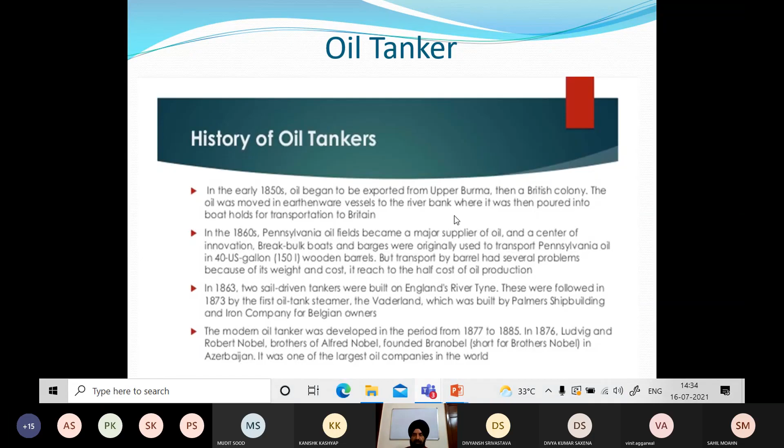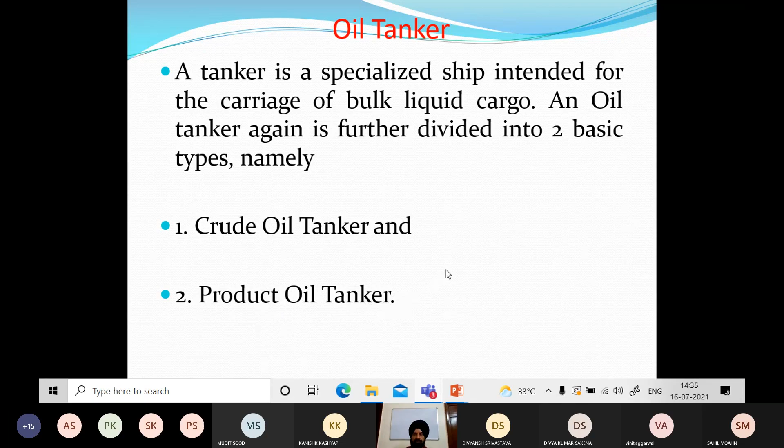So a tanker is a specialized ship intended for the carriage of bulk liquid cargo, and oil tankers are further divided into two types: crude oil tanker and product oil tanker. Crude oil, all of you know what it is - it's just raw oil, mineral oil, which is found in the earth. It is extracted and then a little bit stabilized and then transported from one place to another. Of course all the countries, everybody needs oil. Finally it is refined and then various products are made and they are also again transported. That's also what we call a product carrier.

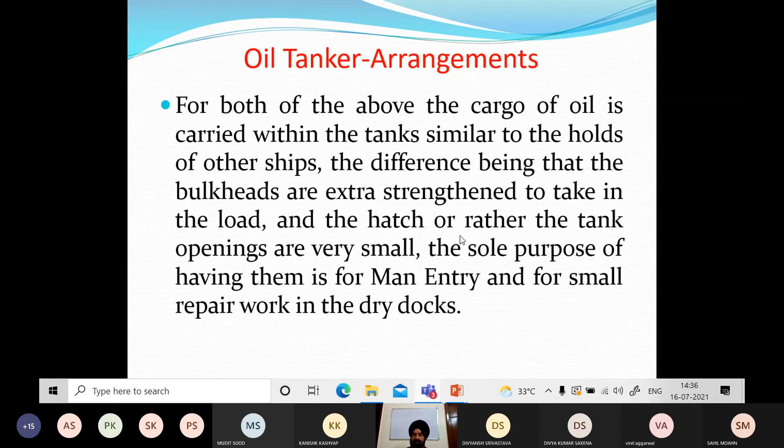Now for both of the above, the cargo of oil is carried within the tanks. Like on other ships you have cargo holds, here we have tanks similar to the holds of other ships. The difference being that the bulkheads are extra strengthened to take in the load, and the tank openings are very small. Now you've seen on other ships, bulk carriers, container ships, the hatch opening is too large for loading the cargo. So here you have nothing, very small tank dome, only in case you have to go for inspection or repairs. The sole purpose of having them is for man entry for small repair work in dry docks. Otherwise it's totally an enclosed tank.

Now the cargo of oil is loaded onto the ship's tanks by pipelines which are fixed. These are not portable, everything is fixed on the ship, permanent structure. The shore pipelines are connected to the ship's pipelines at the manifold on either side of the ship. So when the tanker comes to the terminal for loading or discharging, in the midship area there is basically what we call the manifold, and the shore pipelines are connected there. Previously it used to be flexible rubber pipes, and now, a long time back, we started connecting steel arms, what we call the chiksons.

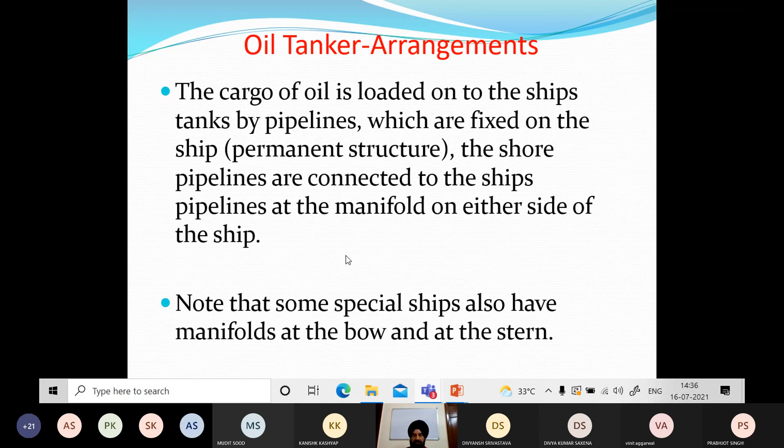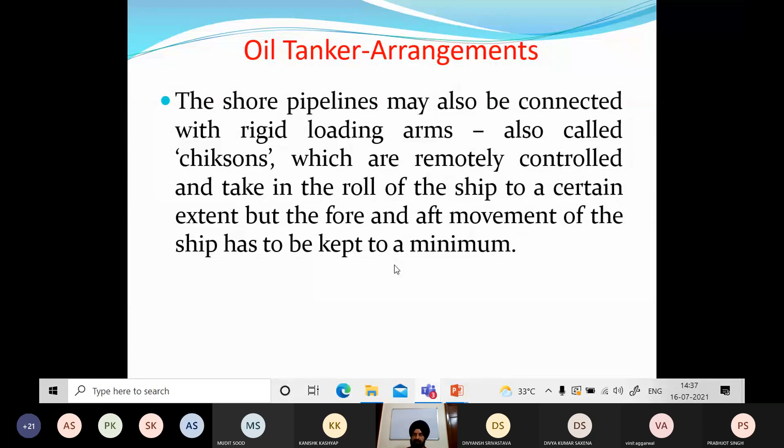The shore pipelines may be connected using flexible steel-rimmed rubber hoses, for small ports or ship-to-ship transfers. These flexible hoses come in small lengths and are connected to each other by nuts and bolts, making them into long pieces. But otherwise, nowadays most ports are also connected with the rigid loading arms, what we call the chiksons, which are remotely controlled and take in the roll of the ship to a certain extent, but fore and aft movement of the ship has to be kept to a minimum.

Now this is how basically - this is your terminal, the ship comes, and this is the chikson, the loading arm, very easy to connect. The only problem here is, yes, they can take this movement, but the movement of the ship in fore and aft - so as a duty officer you've got to be careful, you've got to have your team in control so that the ship's mooring lines, especially the springs, are always kept tight, so that there is no movement in the fore and aft direction. Otherwise these arms are very expensive, they can get damaged, and there can be pollution.

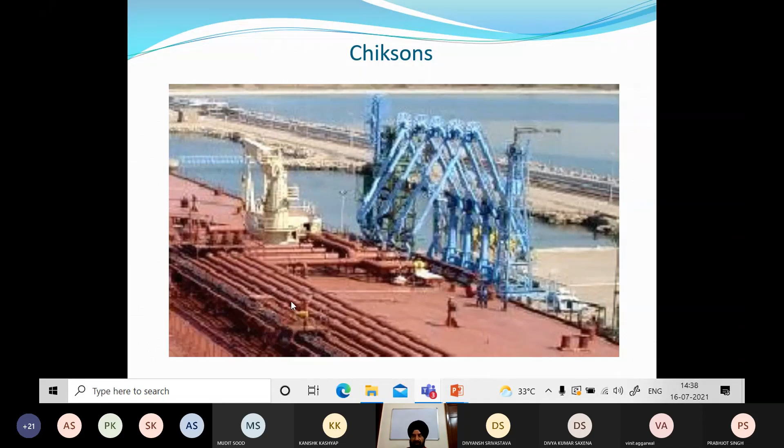So this is basically the initial preparation when the ship comes and berths alongside. While alongside shore cranes, shore gantries, or your own cranes, they start loading and discharging. This area is known as your manifolds, and these are your pipelines. The top lines and various other pipelines are also there.

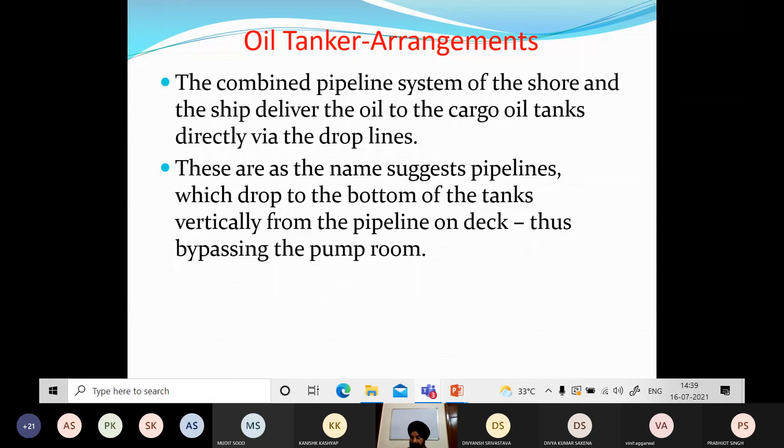IG, deck water, all the pipelines run on deck. The combined pipeline system of shore and ship delivers oil to the cargo oil tanks directly via the drop lines, which as the name suggests drop to the bottom of the tanks vertically from the pipeline on deck, thus bypassing the pump room. So when you have to load, we will see these pipelines also and how they are drawn. This is also a question for you - what are the various pipeline systems, their sketches, and understanding the different types of pipeline systems available on different types of tankers.

The shore system starts to pump, delivering either by gravity or at a low rate. Initially, with the duty officer and chief officer, you set up the line for whichever tanks you have to load - this is called the line setting. Once the line setting is done and everything is all right, you tell the shore people they can start. Normally they start at a very low rate initially, taking oil into one tank, and meanwhile everybody checks there's no leakage on deck, everywhere, in the pump room.

Of course you don't use the pump room during loading time. So all the line masters are kept shut - bulkhead masters, everything, all the valves leading to the pump room are kept shut. Oil is taken onto the top lines, and via drop lines it is connected to the bottom lines running inside the tanks. Then you open the tank valve for the respective tanks, and the oil starts going in.

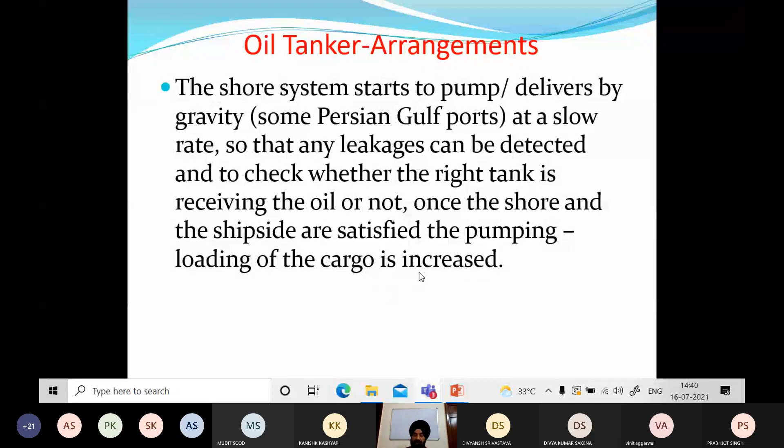The initial procedure involves carrying out checks to ensure everything is okay, no leaks, all working well, oil coming into the tank you've opened, and then finally you increase the rate and open other tanks you want to load. This is a very simple system, but everyone has to be very active and on their toes that nothing goes wrong, because today the pollution rules are very strict, isn't it?

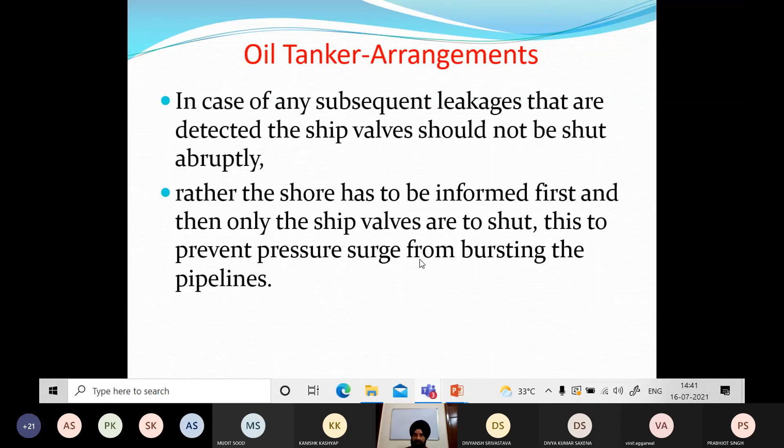In case any leakage is detected, the ship's valves should not be shut abruptly. If there's a leakage, we normally do not shut the valves suddenly. We have to inform the terminal, then only the ship's valves are slowly shut, so that there is no pressure surge. There are things in place to prevent this surge from affecting the pipelines.

The cargo valves are set at times at which they close - this means they are hydraulically remote operated valves. So even if you close them, they will take time, closing slowly, taking about 6 to 8 seconds, 10 seconds, so that there is no pressure surge that can be damaging for the pipelines.

Now while loading the cargo, we have bypassed the pump room. During loading time you connect, check everything, and comply with the checklist, and the pump room is kept away, rather not used while loading. But during discharging time, when I am going to discharge the oil, the pump room will be used because all the pumps are situated there.

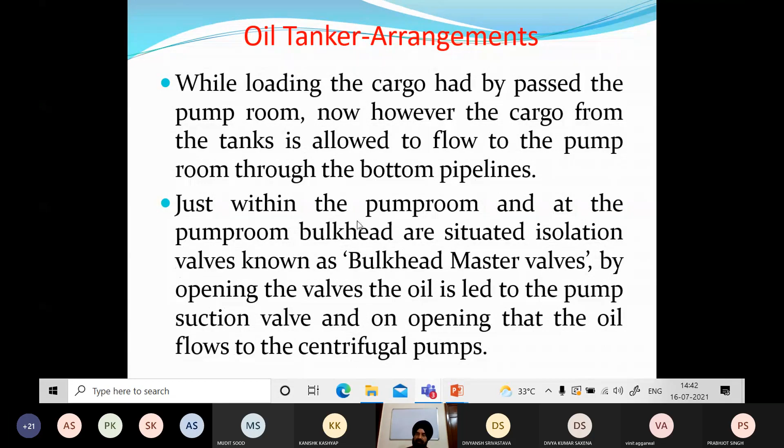Within the pump room, at the pump room bulkheads, are situated the isolation valves known as the bulkhead masters. These valves connect the pumps or pipelines to the various tanks. By opening these bulkhead masters, the oil is led to the pump suction valve, and on opening, the oil flows to these pumps which are basically the main cargo oil pumps, or COPs. The oil flows to these centrifugal pumps.

Turbines situated in the engine room commonly drive these pumps. The shaft penetrates the engine room bulkhead and drives the pump situated at the bottom of the pump room. You must have seen how these pumps are situated in the pump room, with the shaft penetrating the bulkhead, driven either by a steam turbine or electrical heavy duty motors, which are situated in the engine room.

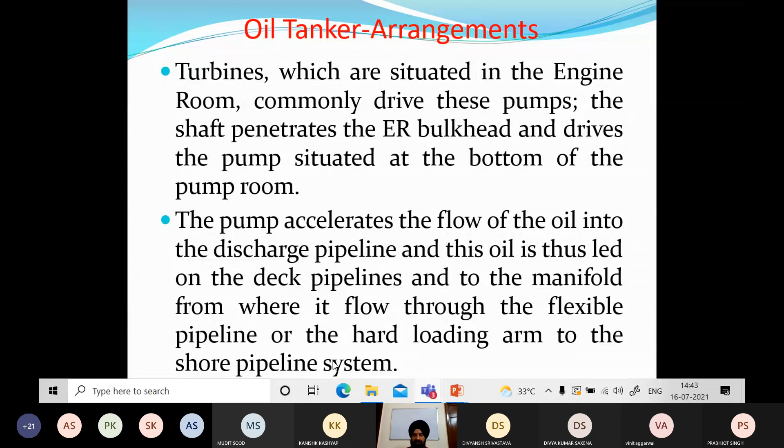And of course you have the CCR, the cargo control room. From there you control everything. The pump accelerates the flow of oil onto a discharge pipeline, and this oil is led to the deck pipeline and to the manifold, where it flows through the flexible pipeline or the hard loading arm to the shore pipeline system. Similarly, during discharging time the ship uses its own pumps, while during loading, shore uses either gravity or pumps.

So while discharging, the ship uses pipelines and pumps to discharge the cargo to shore tanks. The pump room, again, is a cofferdam kind of space. In fact, it is accepted as a cofferdam which begins on the main deck and ends at the keel, going right to the bottom, with many steps and many platforms.

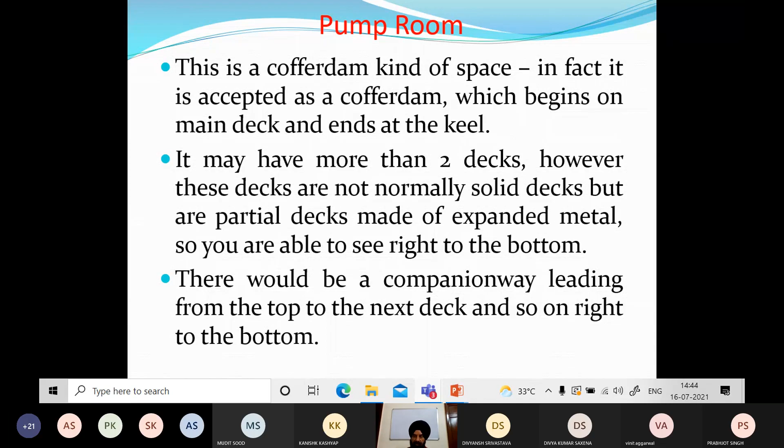So for these pump rooms, as a duty officer, it is also your responsibility that everything goes well and nothing is going wrong. Doing rounds of the pump room is a normal routine, to check there is no leakage, because the pumps are running and oil is going into it, so that also has to be checked.

At the lowermost deck are situated the cargo oil pumps, what we call COPs, and the number of pumps varies. For crude oil tankers, normally we have 4 pumps, and you can use all 4 or maybe 3 at a time. For product oil tankers, the number of pumps depends on the number of grades of oil the ship is capable of carrying. Nowadays, here too, you have 4 sets of pumps and 4 sets of pipelines.

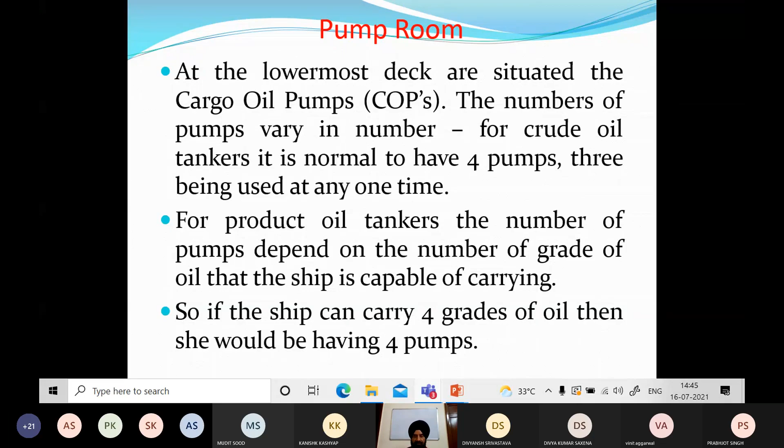So you can use any pump on any pipeline. The system is designed through valves and crossovers so that any pump and any set of pipelines can be used. For the product tankers, the system of pipelines is slightly more complicated, because there you need segregation, since the product carrier normally carries 2-3 grades and those oils should not mix. Whereas in crude oil carriers, almost all the tanks have maybe 1 or 2 grades, but even in crude, slight mixing doesn't make much of a difference.

But if you are carrying diesel and kerosene, isn't it - if diesel goes into the kerosene, the cargo will get spoiled. So therefore, the pipeline system on product carriers is slightly different.

Once gravity flow to the COP is not possible, after you have discharged the main bulk of the oil and the oil level in the tanks goes down, then it used to be the stripper pumps, but nowadays these stripper pumps are also replaced by what we call eductors. Strippers were of course of reciprocating type and have great capacity to create partial vacuum to suck out the remaining oil from the tanks.

Again, on a product tanker, the number of stripper pumps would be equal to the number of grades - over there it's different for each grade.

So now, largely on all tankers, even normal ships, instead of stripping ballast or stripping this oil, we use eductors. I think most of you must have used them - anybody who has not used eductors? Has everyone used them? On other ships also? What do you say? Yes sir, yes sir, we have. So you've all used eductors. But a little bit on tankers, for those who have used them, you need to be more careful, and a question can also come on this - what is an eductor, how does it work?

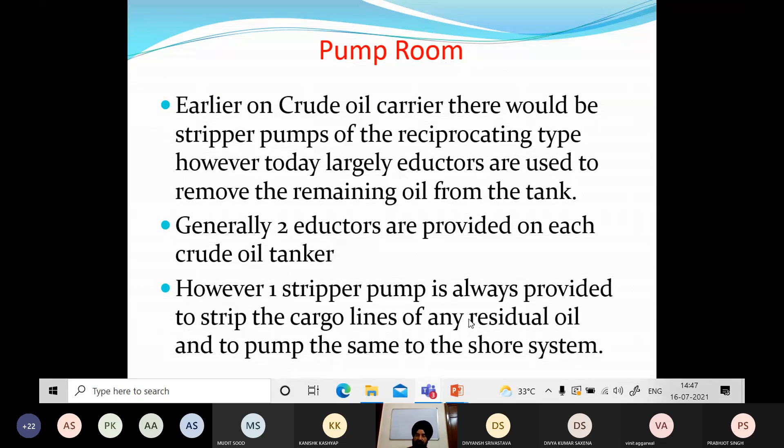Pump room is a hazardous area. So if you know that pump room is there, there can be oil, there can be anything. So all the fittings, ventilation, lights, all has to be gas tight.

And tanker safety torches again, some intrinsically safe. Everything has to be intrinsically safe, right from your walkie-talkies to torches to everything. Not like other ships where we can use any torch, so please don't carry any normal torches which are used on the tankers. They are all intrinsically safe torches, gas tight torches.

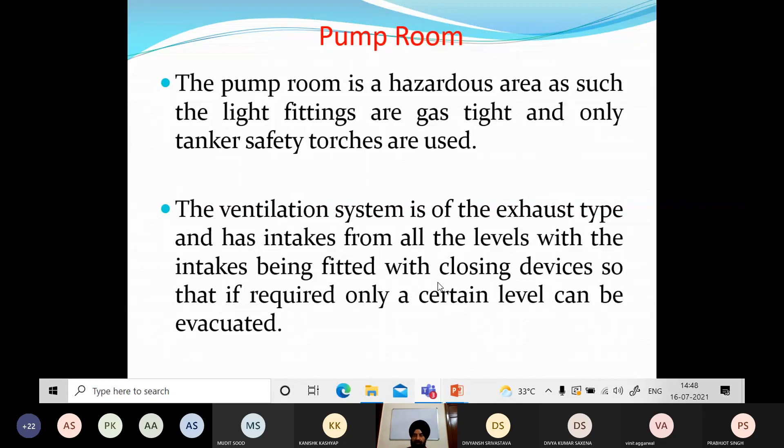Ventilation system, exhaust type and intake from all levels with the intakes being fitted with closing devices. So normally for the pump room you have this exhaust system where the trunking goes to all the levels and it takes the suction. It is on the exhaust side, it keeps running and circulation is there so that there's no build up of hydrocarbon inside the pump room.

Hydrocarbon gases, being heavier than air, tend to settle at the bottom of the pump room. So the main exhaust is always from the bottom level. So you will find that oil will definitely be collecting in the bilges.

Normally we keep very good care that if there is any leakage we try to repair it. Pump room bilges are always kept clean, dry, so that there's no oil, no gas formation. If there is a gas formation, hydrocarbon mixed with air can create lot of things - flammable mixture, dangerous, any spark, and then explosion can take place.

So at the top of the pump room, harness lifting arrangement is provided to lift out. This is also something as a duty officer you need to take care of, that you must take a round on top of the pump room, and for emergency purposes you always keep a harness provided in case somebody falls or something happens, so that at that time we can go to find them.

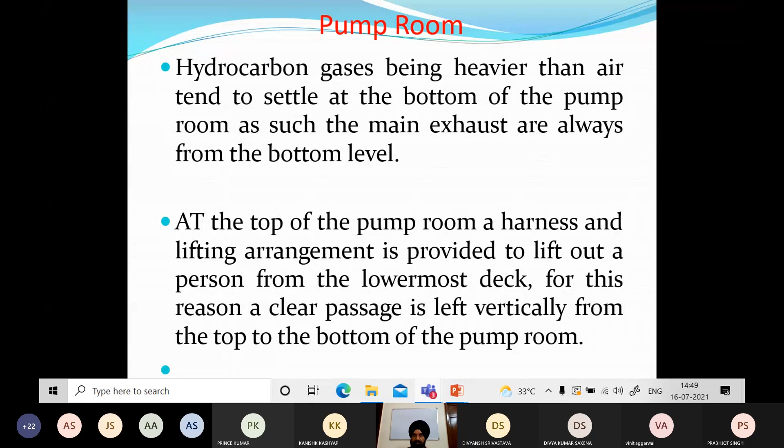Clear passage is left vertically from top to bottom of the pump room. So the pump room also has quite a few precautions.

When you go, the ventilation should always be on, lights not necessarily needed. So in case there is an emergency, do not run into the pump room if it is kept closed.

Ventilation is most important. Fireman's outfit placed at the top of the pump room, and it may have different types of fixed firefighting appliances such as total flooding, CO2, or foam applicators. So everything is included, fitted here.

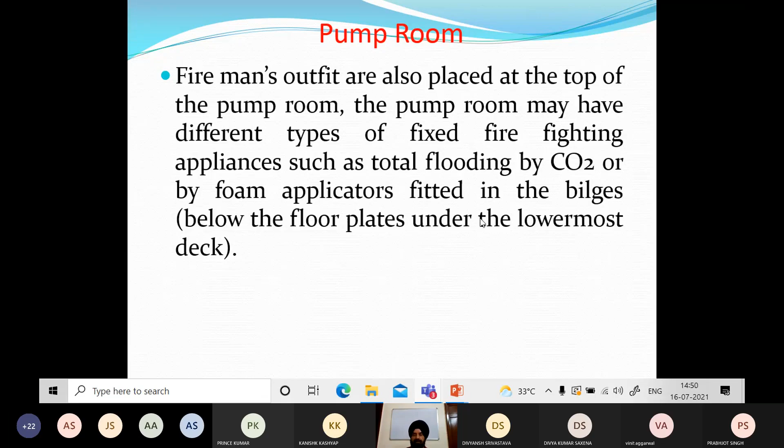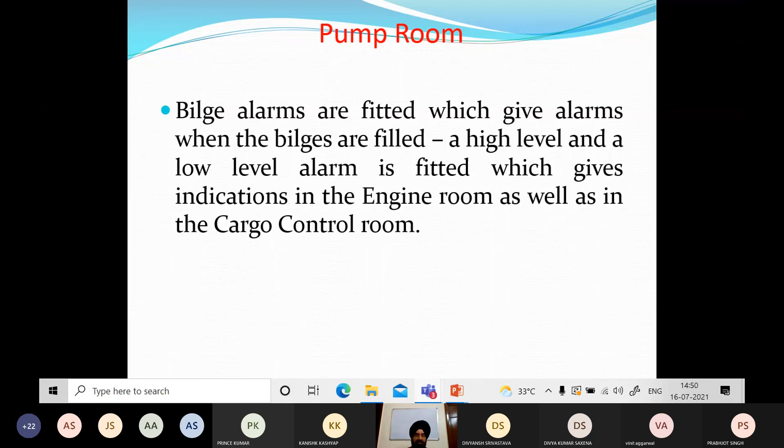Bilge alarms are fitted which give alarms when the bilges are filled - high level, low level alarm. So all of this so far you were doing under somebody's instruction, somebody's supervision. Now you are independently working as a second officer, third officer on these tankers. So you've got to be careful about what precautions need to be taken, what needs to be in place.

Centrifugal pump situated in the pump room bottom platform consists of an impeller which rotates within the casing, and due to this rotation, which is generally about 1000 to 1700 rpm, the oil is sped up, and this increase in velocity causes the oil to flow out at a greater pressure.

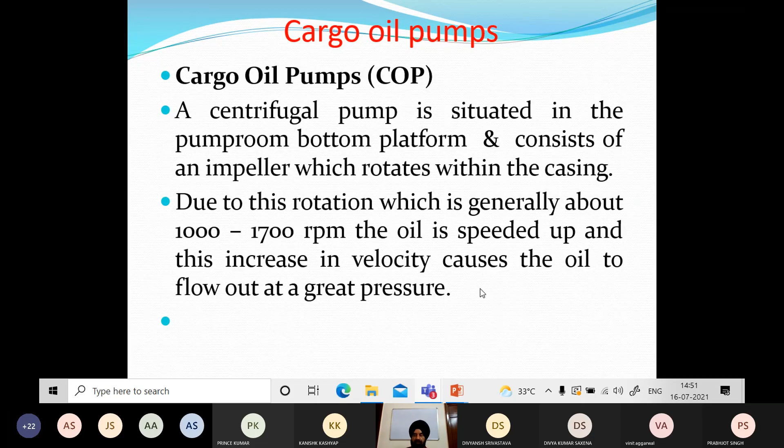So you can push the oil far away up to the shore tanks. And these pumps are capable of delivering a very high rate of discharge, up to 4000 meter cube per hour. Within this type of pump, the level of oil has to be above the pump, so the pump is situated at the bottom of the pump room, and your tanks are of course full up to main deck level.

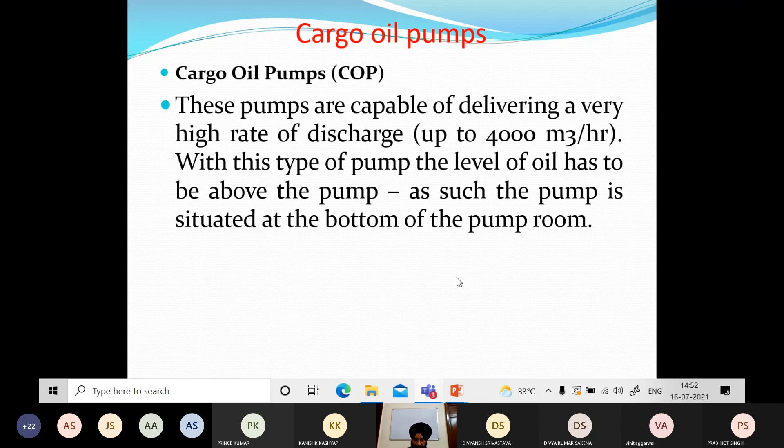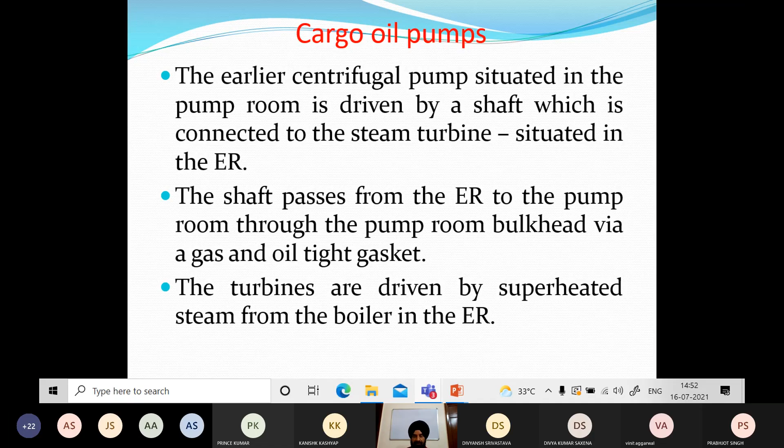There is high enough head for these pumps to pump out all the oil from most of the tanks. The centrifugal pump situated in the pump room is driven by a shaft connected to the steam turbine, and the shaft passes from the engine room to the pump room through the pump room bulkhead via a gas and oil tight gasket. So nothing, no gas, can go into the engine room from the pump room side. Turbines are driven by superheated steam from the boiler, and these turbines turn the shaft and drive the pumps.

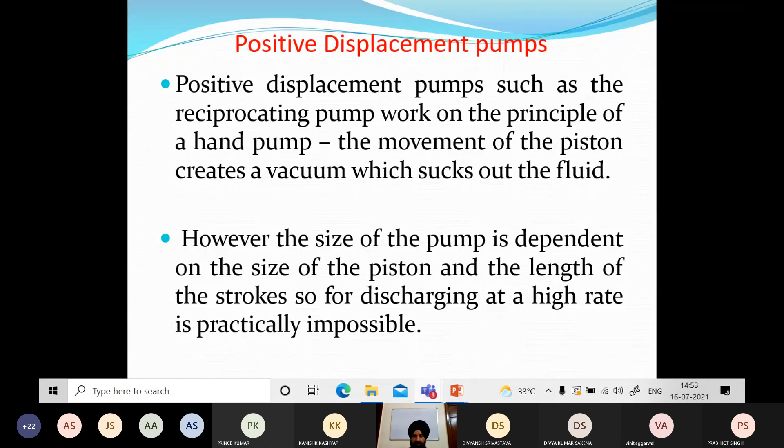Second, you have the reciprocating or positive displacement pumps. These work on the principle of a normal hand pump, as you may have seen. The movement of the piston creates a vacuum which sucks the fluid, so it is normally known as positive suction, positive discharge. So their precautions are different. The size of the pump is dependent on the size of the piston and the length of strokes for discharging.

So all these pumps are given for cargo discharge and cargo handling equipment. These pumps are used to discharge small quantities of oil such as strippings. The balance that the centrifugal pump cannot discharge because the oil goes below the level of the pump, so naturally the pump's suction level is below the oil, making it difficult for the centrifugal pump to lift.

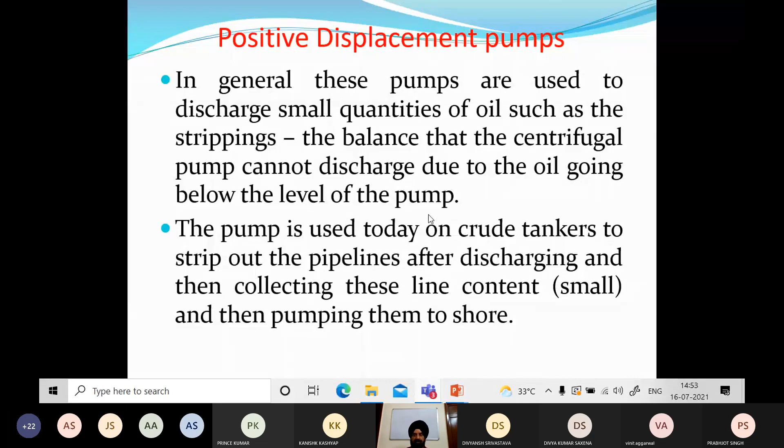So then we use the eductors. Eductors are very simple, working on the principle of Bernoulli's principle. A driving fluid is pumped down the main line with very high velocity, what we call the driving fluid or the drive. So first you start the eductor drive.

It can be like on general ships, where you have the ballast pump running sea to sea. Here you run the oil, say from one tank, slop tank to slop tank, and then oil is diverted via the eductor. When the oil is passed through the eductor, a vacuum is created, and then whichever line you want to strip, you open that tank valve, so it will start stripping and collecting the oil into the same slop tank.

The driving fluid is pumped down the main line with very high velocity through a constriction past a relatively smaller opening, thus creating a vacuum. When eductors are used for clean ballast, the driving fluid is seawater. When used for stripping crude oil, the driving fluid is the cargo itself, delivered by means of one of the main cargo pumps. We normally run from slop to slop, and all the oil is collected into the slops and finally pumped out.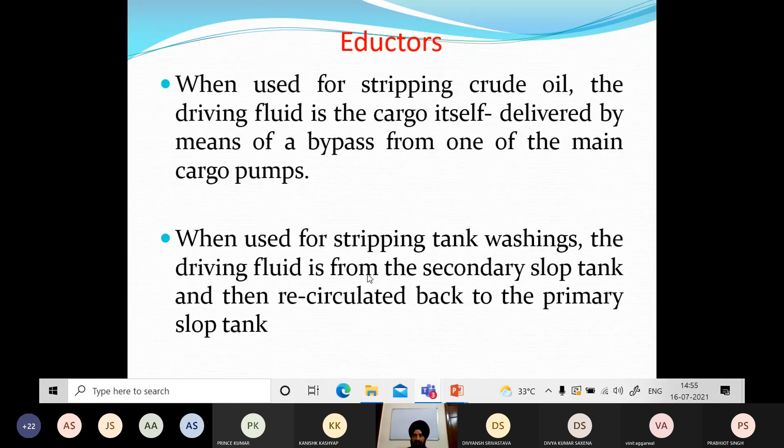Eductors are simple, rugged, have no moving parts, do not become airlocked like other pumps, and are widely used on tankers of all types.

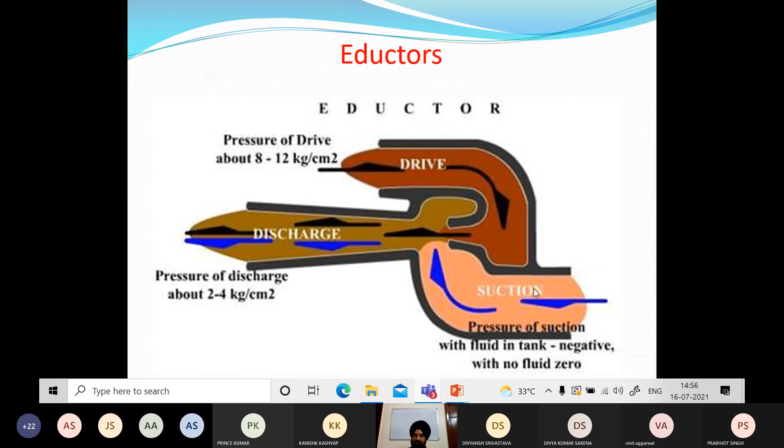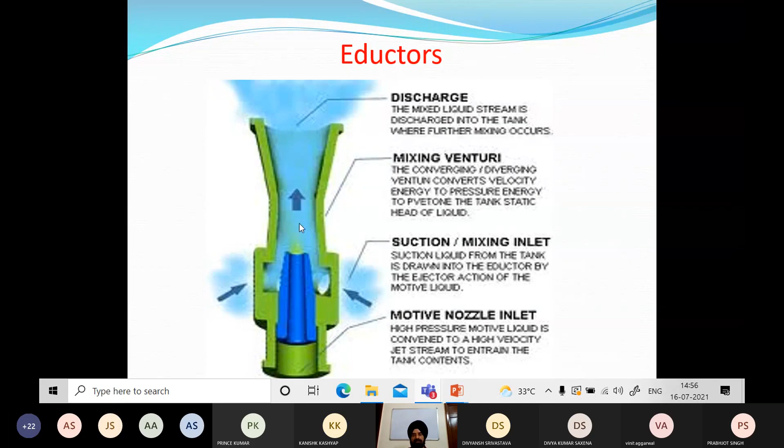Here you need a little precaution. Do not open the tank valve first. Let the driving fluid develop a little vacuum first, otherwise the oil may go back into the tank. Of course it is simple once you start working. This is basically how it looks: there is a small nozzle inside a special metal that creates this high pressure, and then suddenly the pipeline diameter is increased, and a vacuum gets created there.

Eductors should always be operated at or near their design driving pressure, and in general low driving pressures will considerably reduce performance. If the driving fluid pressure is only 5-6 kg, nothing will be pumped out, so it has to run at 8 to 12, or whatever the design is, normally say 8 to 10 kg. Higher back pressure in the system than the eductor is designed for can also reduce efficiency. Higher back pressure means if your slop tank is full, there will be back pressure on it, which will reduce the efficiency of the eductor.

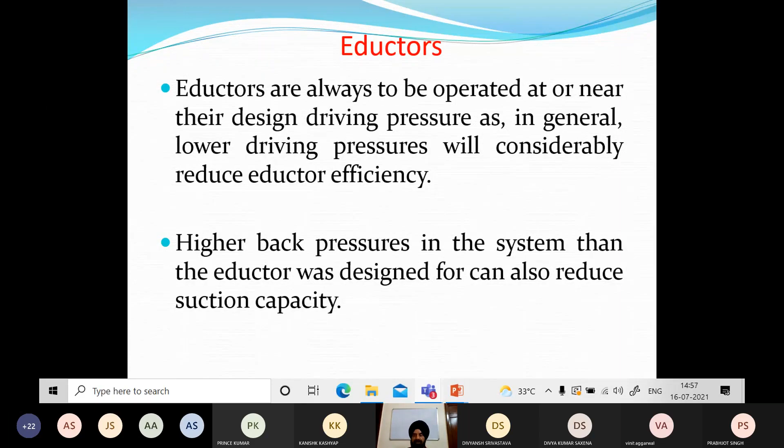Eductor drive liquid must always be flowing before the suction valve is open, to prevent backflow of the driving liquid to the tank suction. Same thing when shutting down an eductor: the suction valve is to remain open until the eductor is stopped, to prevent the eductor from drawing a vacuum on the suction line.

So these are a few precautions you will use. So now you know how you have been using it.

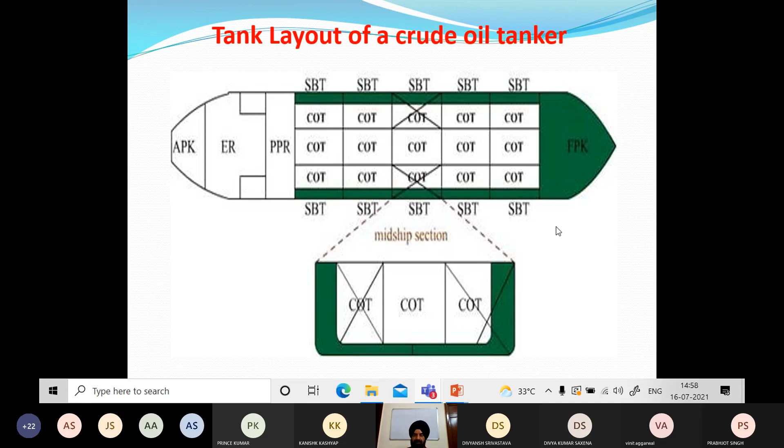So making this sketch isn't difficult either. You can explain the layout: these are the oil tanks, these are the segregated ballast tanks, the pump room is aft, and all these tanks are connected with the pipeline system.

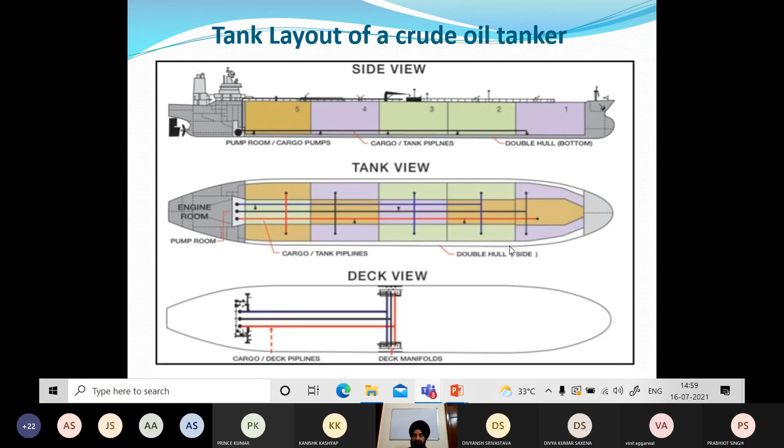What are the various pipeline systems we have? Basically there are 3 systems of pipelines found on tankers: ring main, direct line, and of course nowadays submersible pumps or single line, single tank system, basically on product and chemical tankers. For most product tankers, what we call Framo pumps is also a very good system, but this Framo pump is only on product or chemical tankers, not on crude oil carriers. And another is the free flow system.

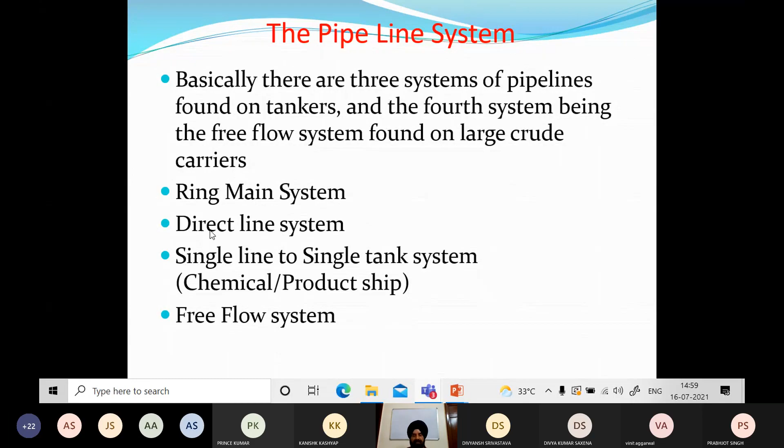So you have 4 systems here. Questions come on these: what are the various pipelines, describe one of them, or he may ask you to describe or make a sketch of any of these, the ring main system or direct system. It's given in your books also.

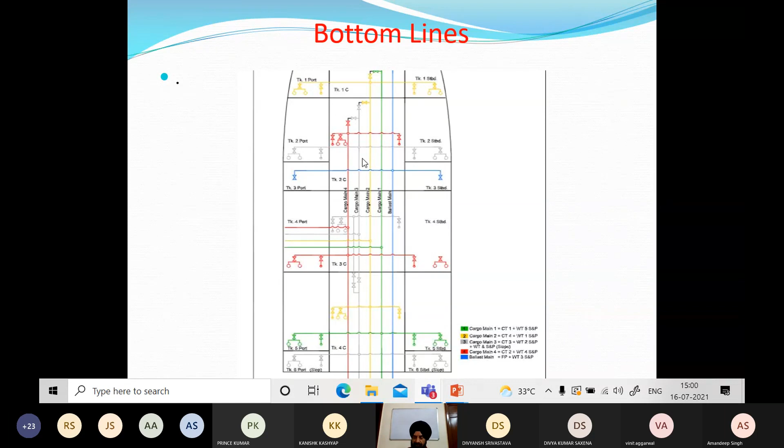So basically if you see these sketches, these are the bottom lines, meaning these lines run inside the tanks, and they are differently color coded. You have this plan in your CCR showing how this pipeline is running. It's very simple to make. And similarly you have the drop lines.

Now you may be getting confused about what drop lines are. This is your on-deck main manifold, where you connect both sides, port and starboard. You can connect either side to the shore lines or your flexible hoses for loading or discharging. The oil comes into these main deck lines, which run on the main deck, and these lines are connected from here to what we call the drop lines. They vertically connect from this line directly onto the lines running inside the tanks, and these are called the bottom lines, running inside the tanks.

So the oil comes from here, and there are valves here on the deck also, and similarly on the bottom lines what we call line masters, also called bulkhead masters. Now if I close these valves here also, what will happen? The oil will come from here if I am loading, so the oil cannot go past this, and this is basically your pump room.

Here your pumps are situated, so this is totally bypassed, nothing goes into the pump room. Similarly, these bulkhead masters in the pump room will also stop the oil from these pipelines going into the pump.

So this is totally isolated. The oil is coming through the shore lines into this, and it drops whichever line you want to use. Normally you use 2 or 3 lines, normally 2 are enough for loading, and then you can of course divert oil into any tank.

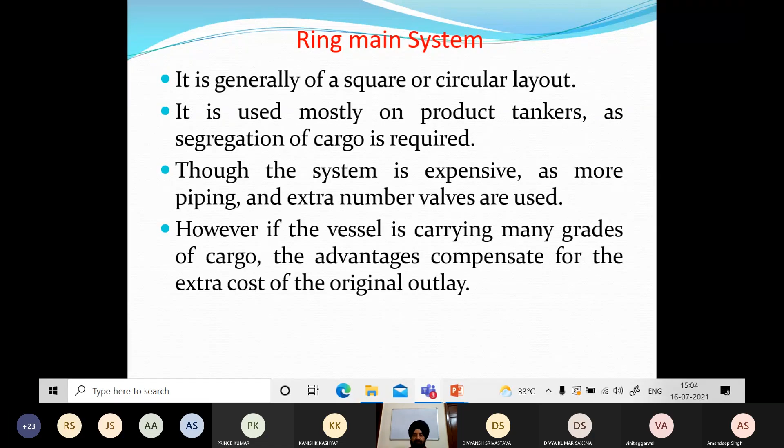And this is another system, what we call the ring main system. This is mostly used on product tankers. Here you have one line, you have another set of lines, and they are also interconnected with the crossovers. Crossover means one line can be connected to another set of tanks or another set of pipeline.

So one pipeline is running, serving this tank, this tank, this tank. These are again your tank valves, what we call the tank suctions.

So you open this valve and oil will start coming into this line and your pump can start discharging, just as we saw in the beginning.

Now during discharging time we open these bulkhead masters. So the oil from this pipeline will come into the pump. The pump, of course, when you start it, will take the oil and start discharging. So this is the suction. Here is the pump, and as you saw, COP, centrifugal pumps.

So they will discharge into this line and then you open this line master also. If you are using this line, you've opened the bulkhead master, opened the line master, and then you start the pump and the oil is going here. During discharging time you keep these drop valves shut so that oil doesn't come back from here.

And then the oil, you open the manifold valve and it goes ashore. So sometimes if you find any leakage or anything, normally at the manifold we also have trip switches, and you can immediately trip the pump so that there is not much spillage.

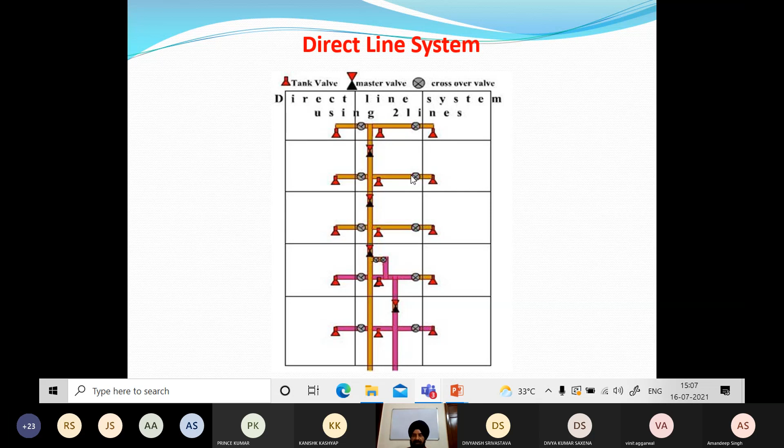So direct line system is again like this type. This question is common. Various pipelines, practice sketching this, it's in books also, not so difficult. These are your tanks and these are your pipelines. Direct line system mainly found on crude oil carriers, where up to 3 grades of oil can be carried.

Most direct pipeline systems are fitted with 3 direct lines. The system is cheaper to construct. And disadvantages over the ring main system: line washing is more difficult. The system has fewer valves which make pipeline leaks difficult to control.

In crude oil washing, on crude oil tankers we don't do as much tank washing compared to product tankers, because there one product follows another, whereas here it's crude oil after crude oil. So what we do for cleaning the tank is crude oil washing, but on product tankers, you have to wash the tanks. After kerosene you may be carrying ATF, you may be carrying naphtha, you may be carrying diesel, isn't it? So different products, so for that tank cleaning is most important.

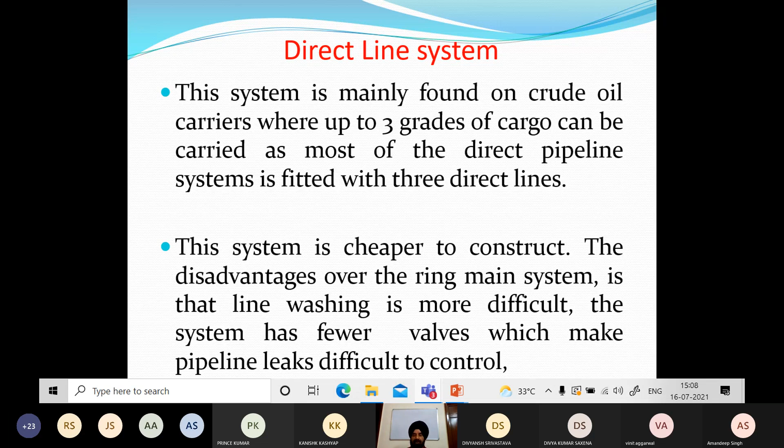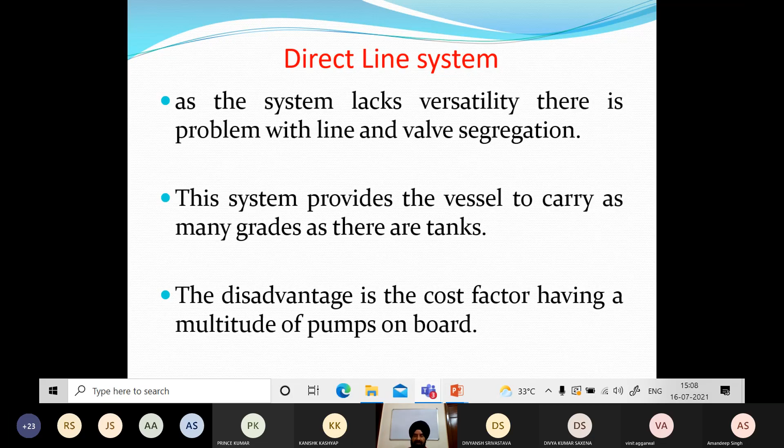So in the direct line system, as the system lacks versatility, there is a problem with line and valve segregation, which is not required. The system provides the vessel to carry many grades, and the disadvantage is cost factor, having multiple pumps on board.

Free flow system, of course, very few ships have this. I worked on the Zakir Hussain, Rajendra Prasad crude oil carriers. So there we had this free flow system.

Basically on the bulkheads there are gate valves. So you open these gate valves, the oil starts flowing from one tank, say from one center to two center, to three, to four, and at four center you open your pump suction, and the pump starts taking suction from four center, and all the oil starts flowing from forward to aft tanks. But nowadays very few ships have this free flow system.

The system is usually found on large crude oil carriers where cargo piping is not used for discharge. Instead, gate valves are provided on the bulkheads of the tanks, which when opened allow the oil to flow freely into the aftermost tank into the COP. An advantage is the system is primary cost factor, allows for fast drainage, efficient means of pumping the cargo tanks, and the disadvantage is only one grade of oil can be carried.

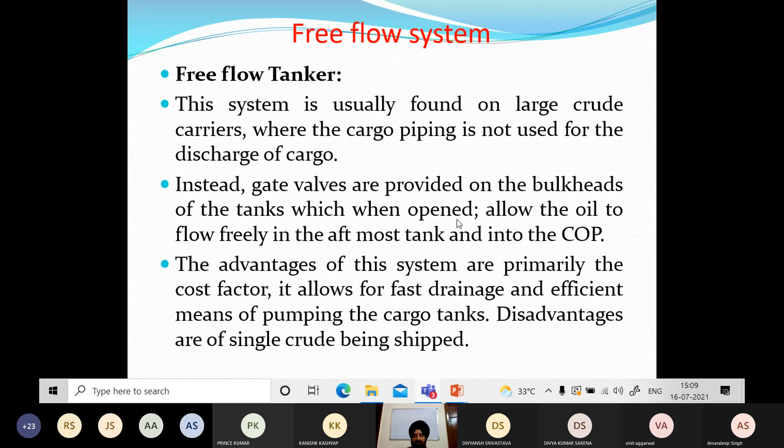Free flow is less common nowadays because you need multiple grades even in crude also, so that's why you don't have this free flow system much.

Independent system where we have what we call Framo pumps or deep well pumps. The layout is not very common in the tanker trade. The system is normal on chemical ships, but also most of the time on your product carriers, because of this efficiency, stripping is very easy, all the product can be stripped, nothing is kept on the ship. Some product tankers have this system, with a single line serving an individual tank through the independent pump, which could be either submersible or deep well.

In these pumps, normally hydraulic motors are fitted on deck, and the pump is deep well inside the tank, and it pumps the oil. It's a very good system, but the power pack, the hydraulic system, is quite large, because all the motors are running with these hydraulic pumps, or the big high torque motors are there which run all these pumps.

So every pump and every system has its own advantages, its own disadvantages. So this is the pump inside the tank, it looks like this.

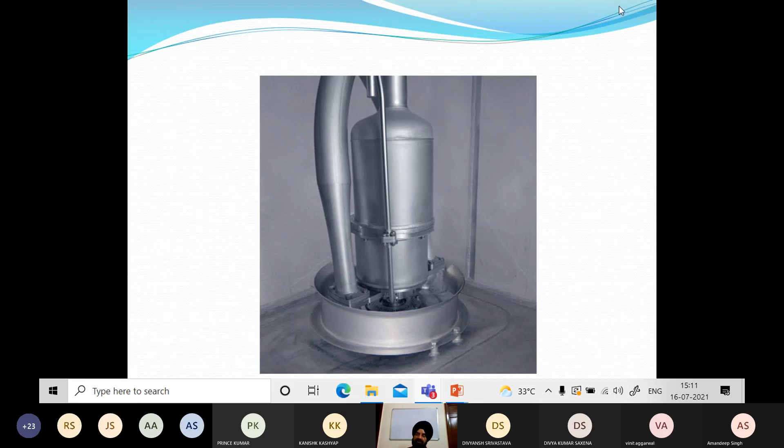So the impeller is here. Basically all the oil flows and it keeps on sucking in, same from the bottom of the tank, it starts discharging to the shore pipelines. So this is what we call the deep well pumps.

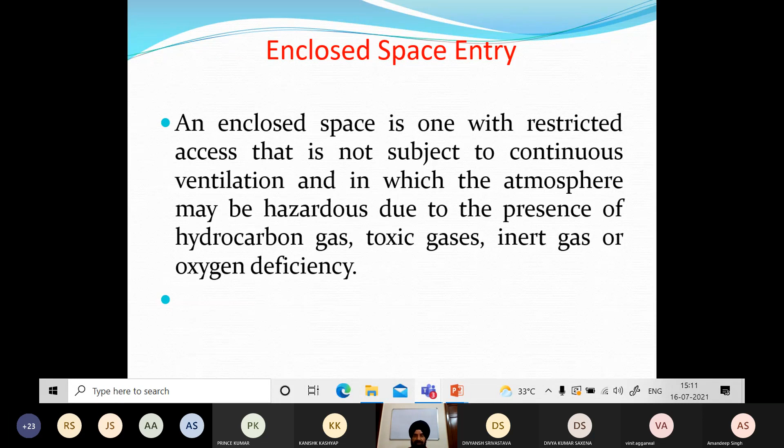So these were your various pumps, pipelines, and enclosed space entry. Of course when we are working, the first thing as a duty officer is safety. Now, enclosed space is one with restricted access that is not subject to continuous ventilation, in which atmosphere may be hazardous, toxic. So your pump room is basically your enclosed space - cargo tanks, ballast tanks, fuel tanks, anything where restricted ventilation is there. So this is known as enclosed space.

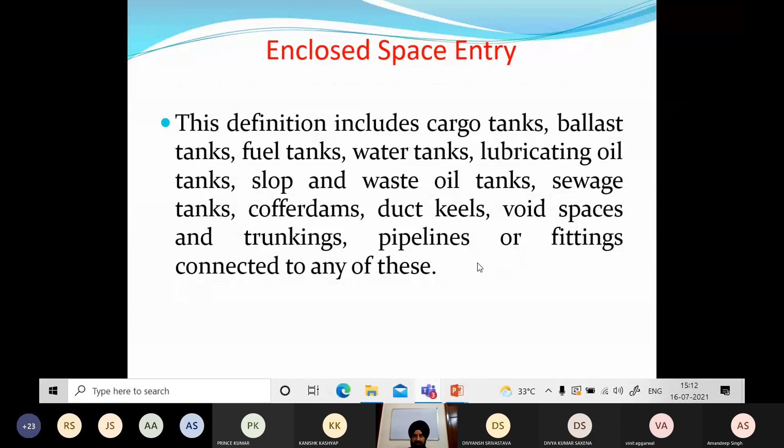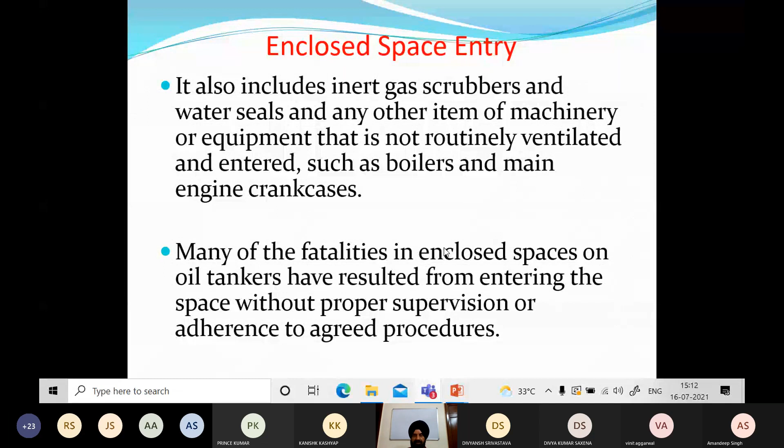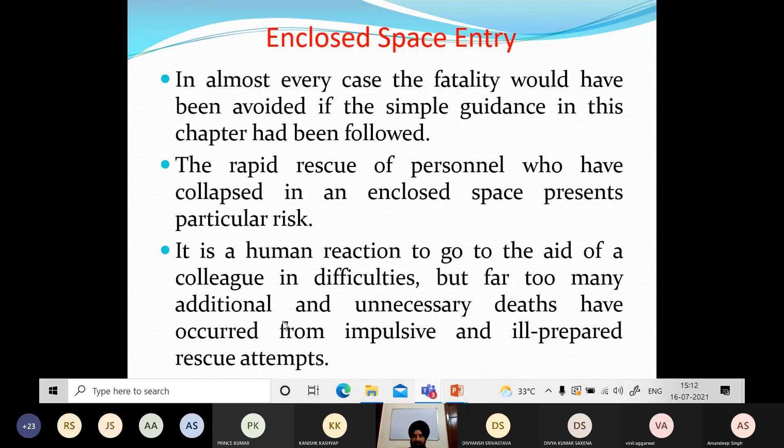So many of the accidents that have taken place in enclosed spaces of oil tankers have resulted from entering the space without proper supervision or adherence. Almost every fatality case would have been avoided if simple guidance in this chapter had been followed. The main thing for this is - it's a very normal human reaction to go to the aid of a colleague in difficulty, but without realizing, becoming impulsive and making ill-prepared rescue attempts, you'll end up into problems yourself also.

So respiratory hazards from a number of sources could be present - this is all applicable for the pump room. It could include one or more respiratory contaminants associated with vapors and hydrocarbon vapors during carriage and after discharge. The presence of hydrocarbon vapor should always be suspected, even in your tanks. Very common - you've gone into tanks, you've gone into the pump.

So in other ships, cargo holds like bulk carriers and all, we have seen that hydrocarbon gases are not there, so you can go do the cleaning, washing. But on tankers, if you have to go inside the tanks, first checking the atmosphere is very important. If anybody tells you also that you go into this tank or check or do anything...

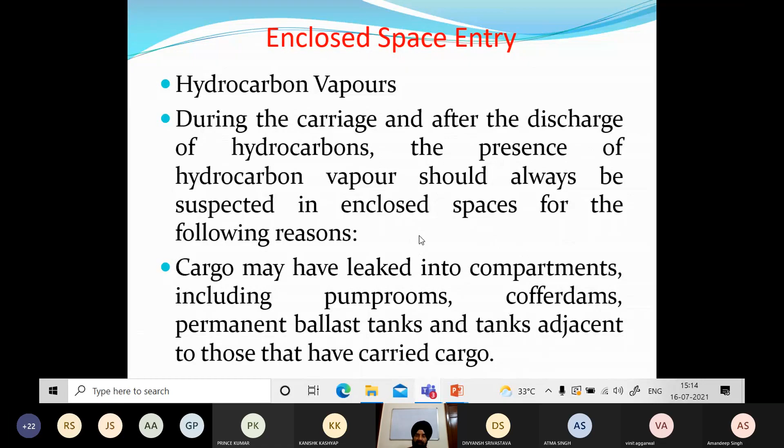And cargo may have leaked into the compartments including pump room, coffer dams, permanent ballast tanks - all of them, please be very aware that it is not only the tanks. So oil vapors can leak into any other spaces, not just the oil itself, even the vapors can go into any other spaces. So cargo residues may remain on the internal surfaces of tanks even after cleaning and ventilation. It's not that just because you did a crude oil wash or water wash, whether it's a crude oil or product tanker, that it's clean now and we can go. No.

Sludge and scale in a tank which has been declared gas free may give off further hydrocarbon vapor. This is common in crude oil - you cannot get rid of the sludge totally. Somewhere in the corners, in pockets, some sludge remains and it keeps on generating gas.

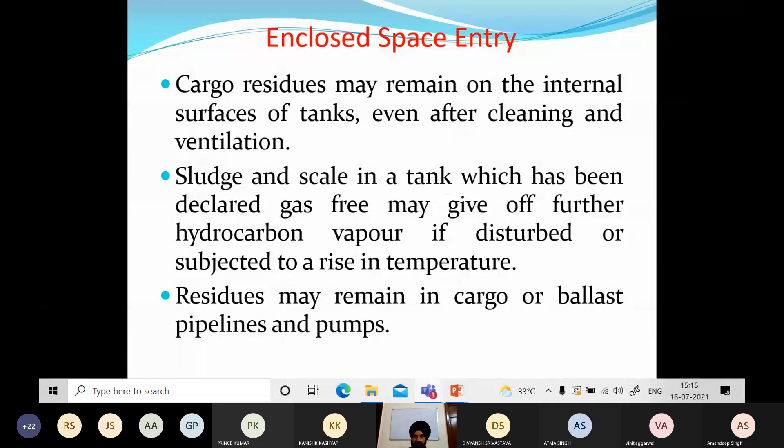But if we have to go in, we check the level - how much hydrocarbon level there is. We keep the ventilation on just to keep the accumulation of these gases down so that you can go and inspect. So residues may remain in cargo or ballast pipelines and pumps - all these things should come to your mind.

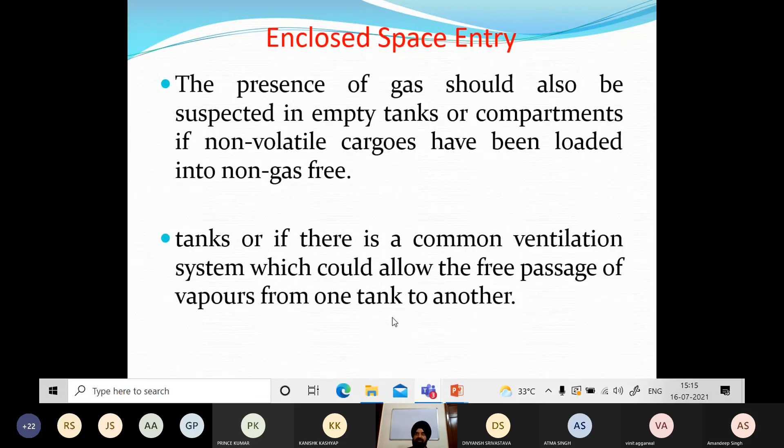So presence of gas should also be suspected in empty tanks or compartments and tanks, or if there is a common ventilation system which could allow free passage of vapors from one tank to another. It's also possible that you washed one tank but didn't isolate it, so vapors from another tank could come into your tank. Oxygen deficiency - you all know, lack of oxygen should always be suspected in all enclosed spaces, particularly if they have contained water or have been subjected to damp or humid conditions. So oxygen deficiency is also there.

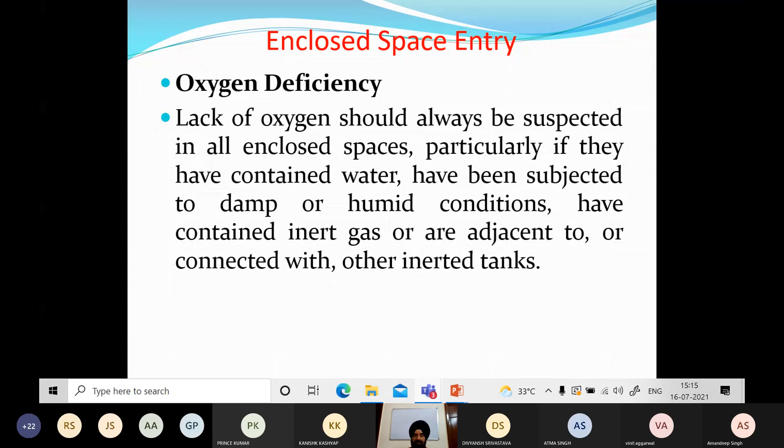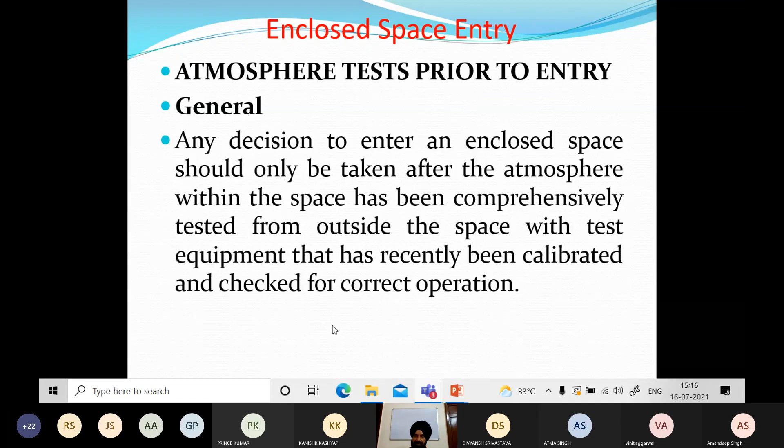All atmosphere testing equipment - we've studied this well, yes it will come in the exam too. On the tankers, what equipment we have for testing, which equipment we use for gas testing. Which gas meters are there? Hydrocarbon meter and oxygen analyzer.

Besides this, there's tank scope, multi-gas detector - yes, multi-gas detector is there nowadays. So you have combined gas detector. Otherwise we will study that, not today. The various instruments - this is the most important thing.

Why? Because now as a duty officer it becomes my responsibility that if I'm checking the gas level inside, first I need to know whether the meter I'm checking with is correct and suitable or not. Like you have the explosimeter, which works in an atmosphere where oxygen is there. Now most of our oil tanker tanks do not have oxygen - they are in inerted condition, and explosimeters do not work in the inert atmosphere.

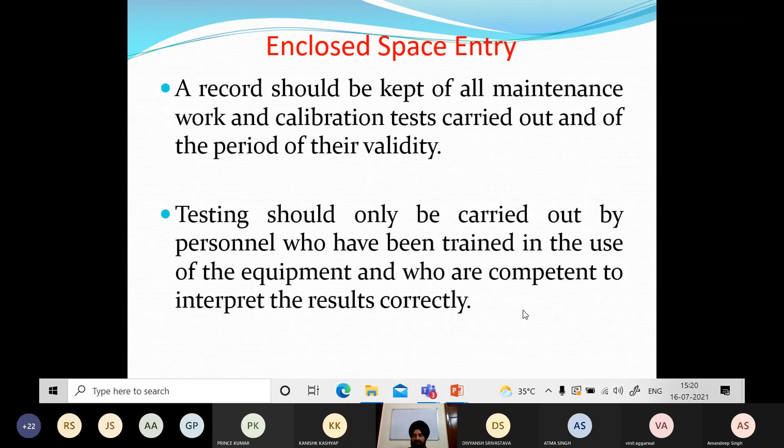And again for those, of course, I will take this in detail when we study the instruments. Record should be kept for all maintenance work, calibration tests, and testing should only be carried out by personnel who have been trained in the use of the equipment. So I think you are using it - it's not that you use it blindly, you should also know its theory, how it works, in which atmosphere it should be used, what are its requirements. Simple instruments - we don't need to go that technical, but the exam also has questions on this, so study it for that reason too, and to use it properly.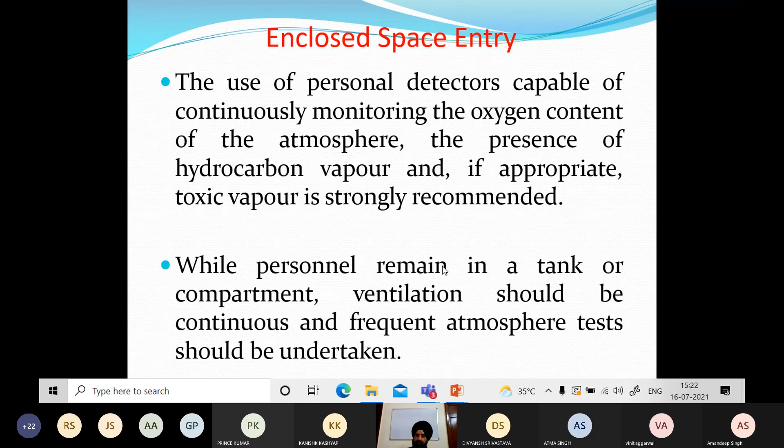And sufficient sample should be drawn to ensure resulting readings are giving you correct reading.

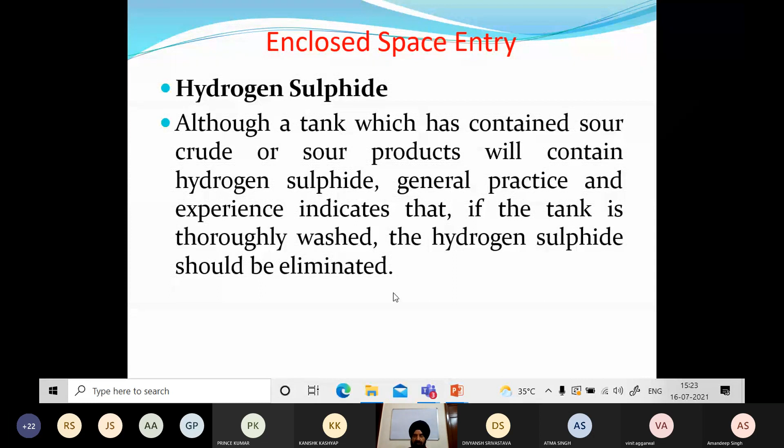Hydrogen sulfide, another big danger with these crude oil tankers, crude oil carriers. A lot of crudes have got very high sulfur content - you have this H2S gas, it will contain hydrogen sulfides. So if the tank is thoroughly washed, the H2S should be eliminated, but otherwise this gas is fatal.

Atmosphere should be checked for hydrogen sulfide prior to entry and prohibited in the event any H2S is detected. Its smell is very typical - if you've worked in a chemistry lab, H2S is present there too. So hydrogen sulfide has the smell of rotten eggs, no mistaking it.

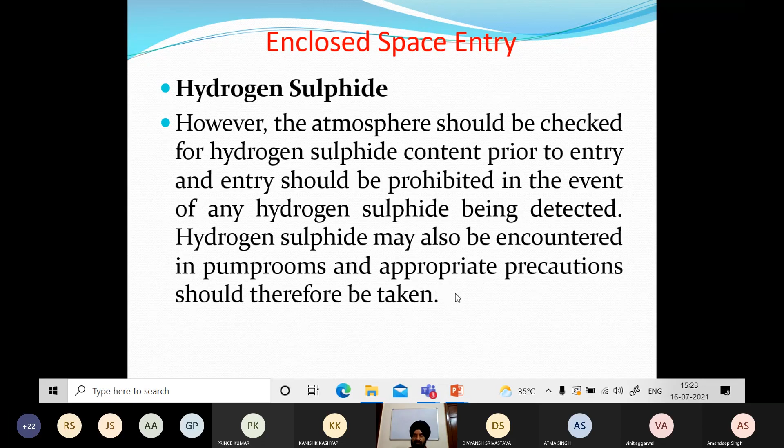For these gases, we have permissible exposure limits and threshold limit values, again often expressed as time weighted - if there is this much gas, this many ppm, this much is allowed. So if the gas is 100 ppm or 50 ppm level, you can work for 1 hour, 2 hours. So there is a time limit.

I told you, no tank is absolutely clean until it's physically cleaned, so there will be some gas. So for this, you can't just put someone inside during dry dock.

I don't know if any of you have done dry docking. So when people go for dry docking, they keep on monitoring this. Lot of cutting, welding has to be done, so cleaning, ventilation, and all these things determine how long people should be kept inside.

So you're working on the ship - if there is something, as a chief officer level, when you study this in detail, what are the permissible exposure limits for a particular gas.

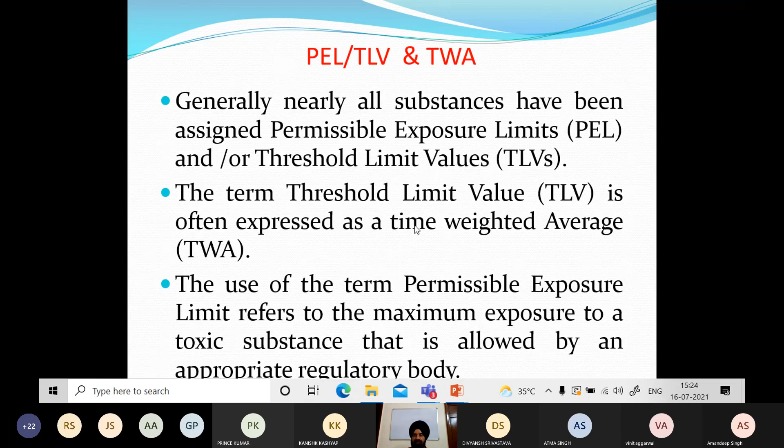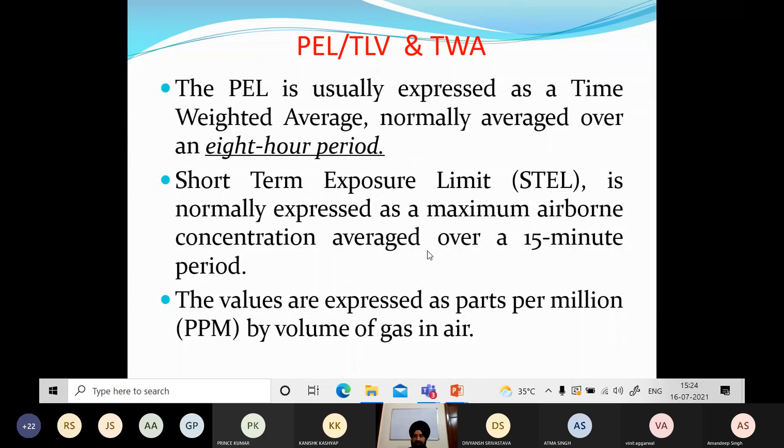PEL is usually expressed as time weighted average, normally averaged over an 8-hour period, and short term exposure limit expressed as maximum airborne concentration averaged over a 15-minute period. These values are expressed as ppm by volume of the gas in air. So a TLV of 300 ppm corresponding to about 2% LEL is established for gasoline vapors.

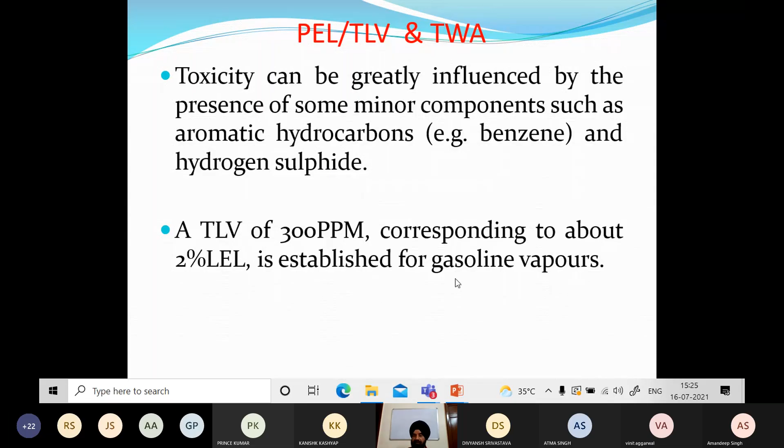So all these things are basically in the entry procedures in ISGOTT, and the company's checklists. I won't discuss those checklists, but you will have these thoroughly checked up - here also what man entry to do, what to do, what can happen. So these are very rough or broad procedures which I have gone through here.

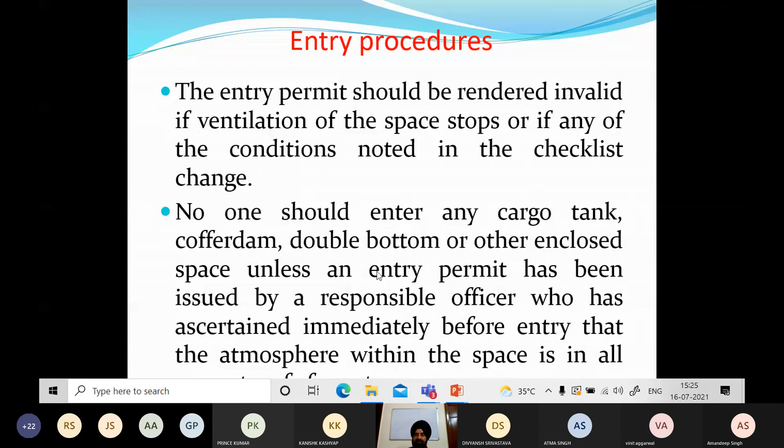Entry permit should be rendered invalid once ventilation stops. No one should enter cargo tank or double bottom unless entry permit is valid. Nowadays this is very common - risk assessment, permit system. So these are all the things.

The responsible officer means you are the responsible officer. You have to ensure appropriate atmosphere checks have been carried out - oxygen is 21%, hydrocarbon level less than 1% LEL, no toxic gas. It's not only these two things - nowadays, toxic vapors, lots of crudes and products have toxic vapors, and ineffective ventilation is also a concern.

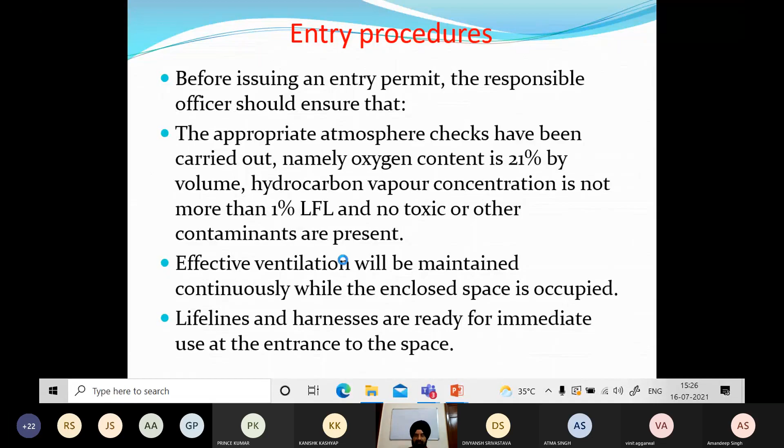चलो ये तो आपका सारा lines of communication. Of course you know this, regular checks for the entry procedure. So ये थोड़ी सी precautions थी.

So basically this is a very broad thing - what is oil tanker, what all the tanks layout, pipelines, and how oil is loaded, discharged, as compared to other ships. यहाँ पे थोड़ा सा operation everything is done by the ship staff.

वहाँ पे other ships, shores, stevedores, other people we were discussing, they are coming, they are loading, discharging. यहाँ पे everything is done by the ship's equipment and the ship's crew, ship's officers, isn't it? So यहाँ पे थोड़ी सी आपको care रखनी है.

So next we will see what are the hazards of this petroleum and instruments and IG system and what is crude oil washing. ये 3-4 चीज़ें हैं आपकी टैंकर थ्योरी में.

इंस्ट्रूमेंट्स भी हैं, उसके साथ साथ आपका IG सिस्टम क्या है, IG प्लांट क्या होता है, how the IG works, and what all precautions with IG, and again crude oil washing, उसकी precautions जब हम crude oil washing कर रहे हैं। Crude oil washing है क्या, उसके procedures क्या है।

कल हमारी क्लास है, I think I have one class with you tomorrow. So we will take the simple hazards and instruments, उसको कल कर लेंगे, and then next week I think 1 or 2 sessions will finish with IG and COW and we will continue. Or चलो पहले इसको ख़त्म कर लें, फिर बाकी रिवीजन का बाद में देखेंगे।

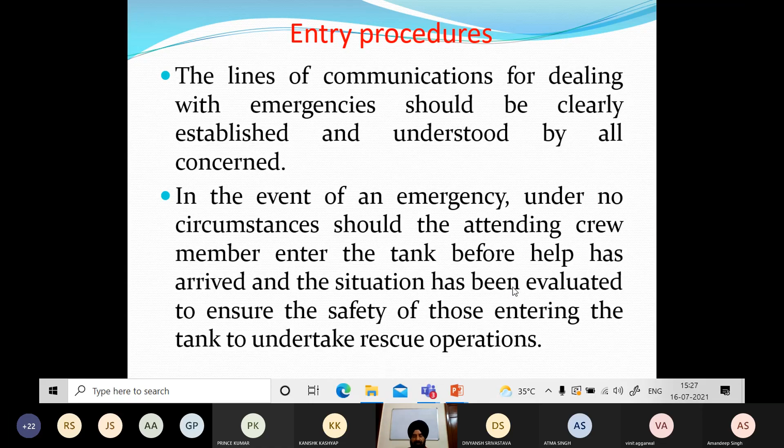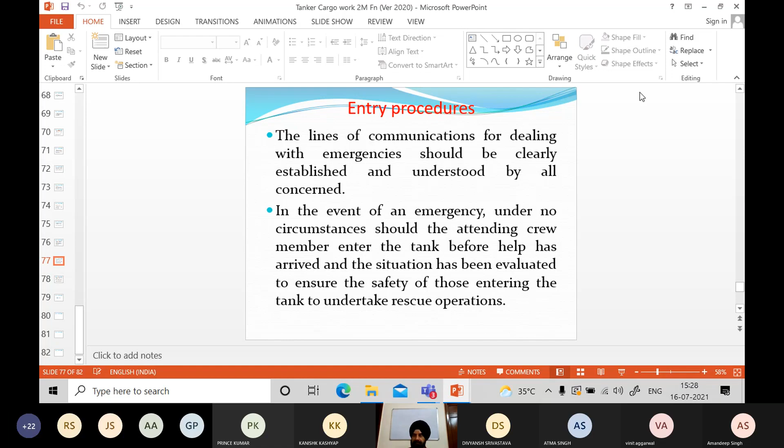चलो, any questions so far what we have done? क्या कहते हो? Any questions on today's topics? कहाँ पे हो भैया? Are you there? You guys or not? Yes, sir.

तो ये भी ध्यान रखना, ठीक है। इसके साथ साथ थ्योरी जो भी आपके पास नोट्स हैं प्लीज़ पढ़ते जाइए।

एक क्वेश्चन इसमें 100%, 1 question will be there on the tanker theory, and easy रहता है, कोई नहीं है। लेआउट हो गया, पाइपलाइंस हो गई, थोड़ा स्केच बना लीजिए, स्केच बनाने की प्रैक्टिस, and advantages disadvantages of various pipeline systems।